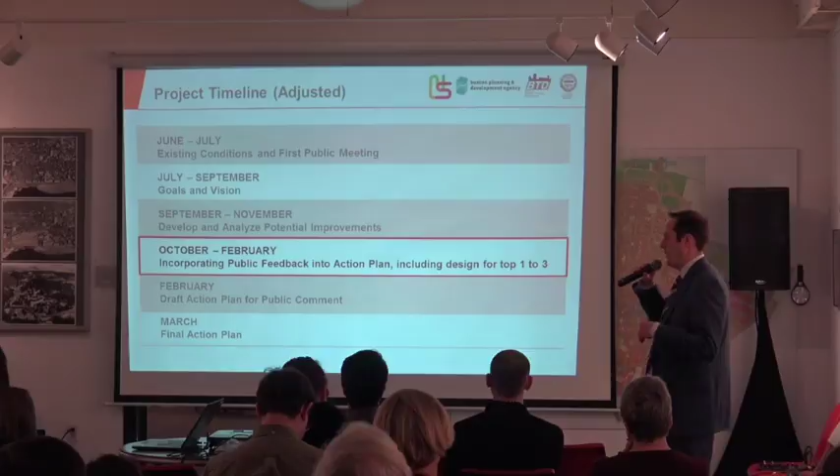We got things rolling over the summer, kicked things off, and right now we're in the phase of trying to develop and synthesize and improve on some action items and recommendations for the plan that we're going to present to you tonight.

Based on your feedback from both that November meeting and the online polling, we're going to recap that, and hopefully these action items are in line with what you guys want to see improved out there.

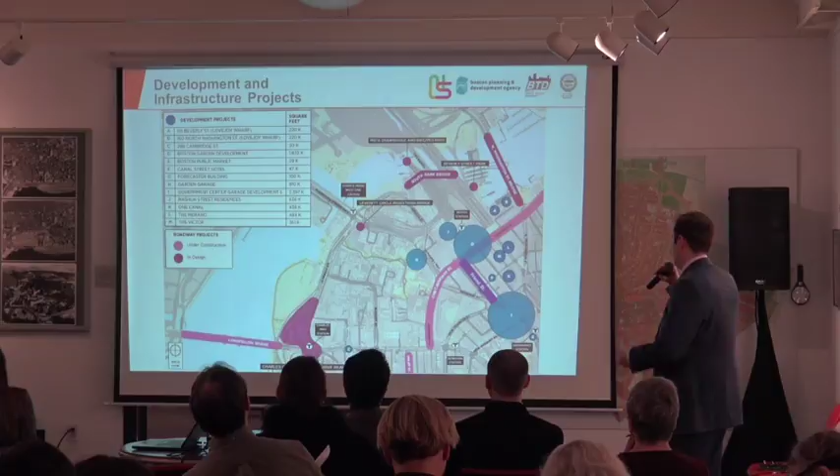This is also a recap slide of a lot that's going on here, both on the private development side and the infrastructure side. The purple is kind of public infrastructure projects that are either underway, nearing completion, or even some longer-term action items that are underway. The blue is all the new development that's coming online.

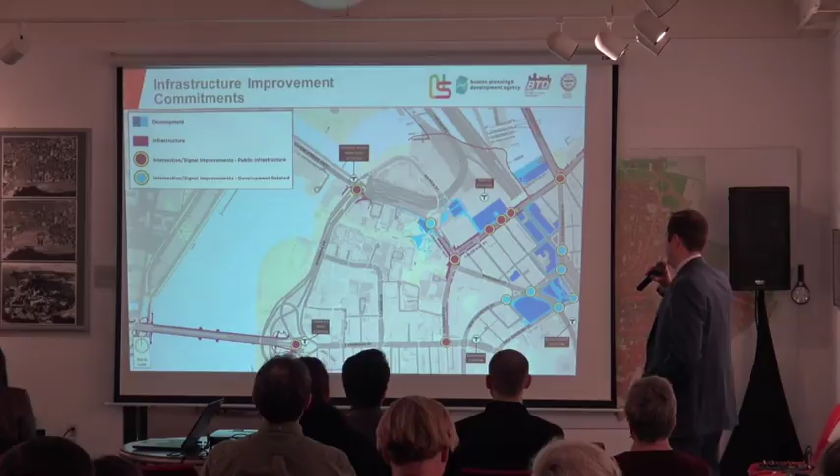I think we've said all along that the emphasis of this plan is to get to actionable items. I think most of our items are on the short-term list, but we also have scope and budget in this process to actually design anywhere from 1 to 3 immediate action items that we're hoping to get done, hopefully within the year, so we can start seeing some real improvements out there.

Just again to recap, we have an interagency team that's been involved. We have Lauren Shurtleff from BPDA, she's a neighborhood planner. Maria Landcliffe from ONS. Bill Conroy is also from the Transportation Department. Public Works has also been coordinating directly with us. Kay Bernard-Smith actually fell ill and she's not here tonight either. But the consultant team, I think we hired, is led by Howard Stein Hudson. Pete Stipman, who's the project manager for us, is going to take over now and walk through all of our ideas for you to react to and give us your feedback on.

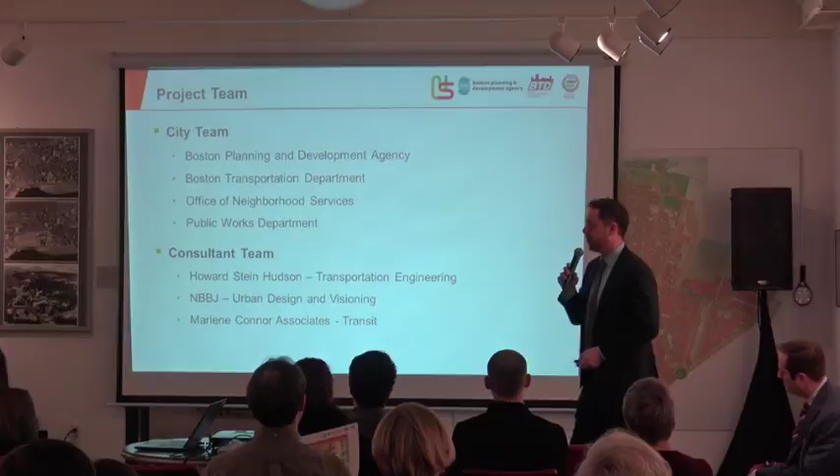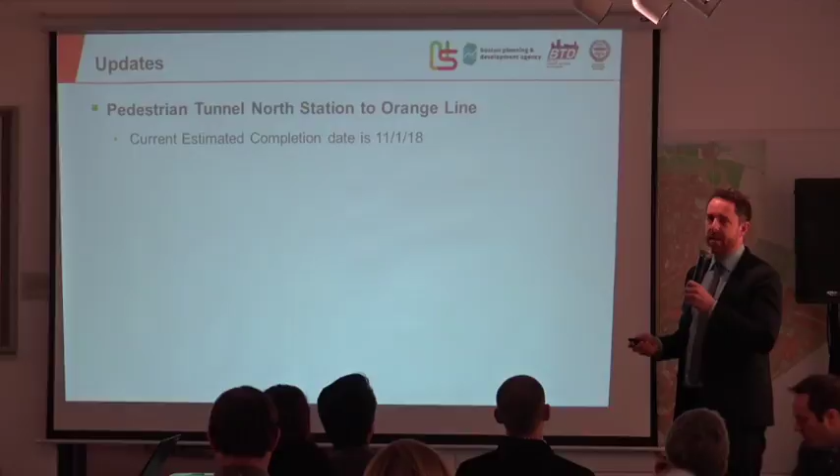First I want to go through the whole process we've gone through so far together, and I want to thank all you guys who gave input. We've done it a lot of different ways. We'll go through it: wiki maps, public meetings, we were actually out on the street, we did design charrette type things, and big, large group discussions. We've really tried to make sure the action plan is rooted in what you guys are telling us.

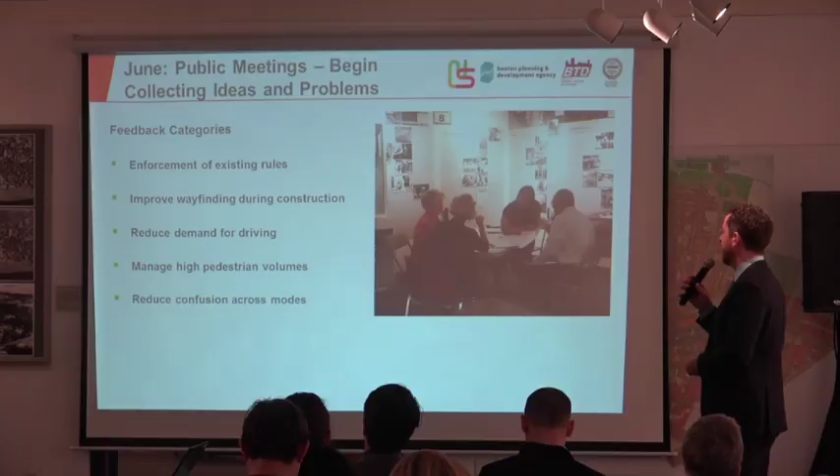To recap quickly, back in June we started with a public meeting where we asked people about their ideas. This is just a smattering of the stuff we got. We heard about ADA issues, traffic issues, people trying to get places walking, all different stuff, and we used maps to collect a lot of that.

Then we took it out on the road and went to different parts of the neighborhood strategically. We wanted to talk to transit users, people using the parking garage, people walking through the throughway and residents, people using the area for shopping, and also on Canal Street, which is a major thoroughfare for a lot of folks.

So when we were out there, we also got tons of feedback. We had about 9 or 10 of these maps full of comments, a lot of interesting conversations, and really enlightening stuff. And then we actually went further and took that onto Wikimap.

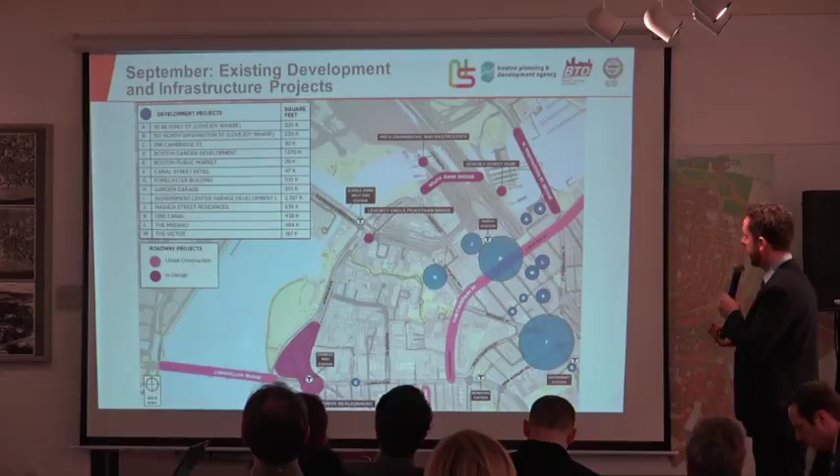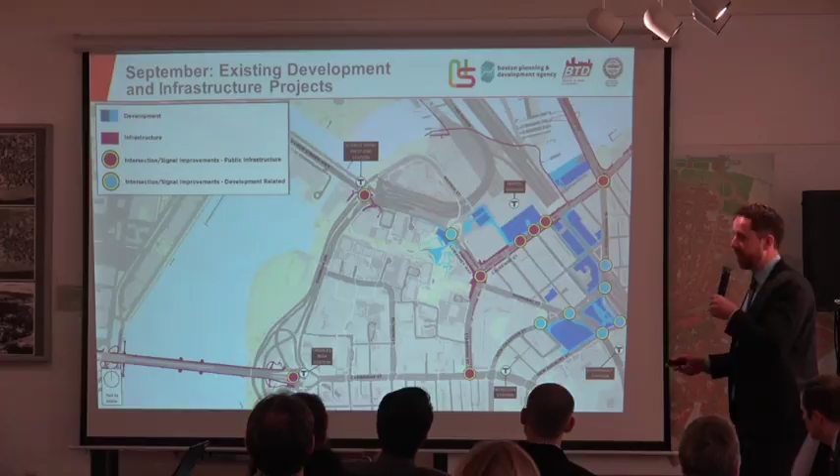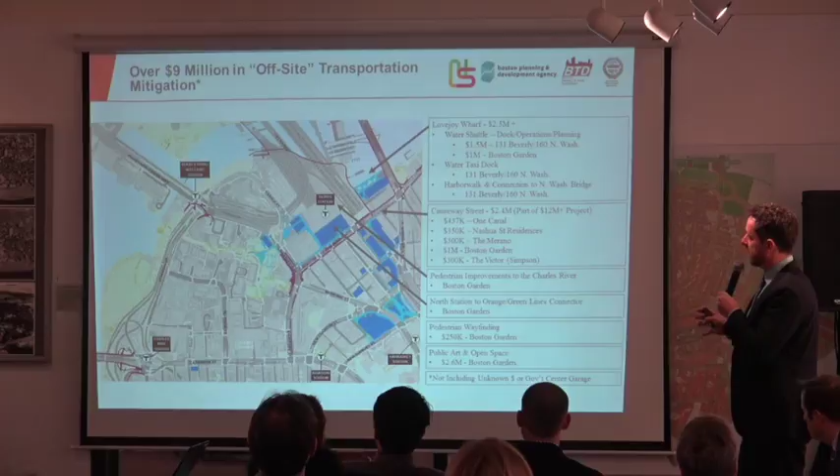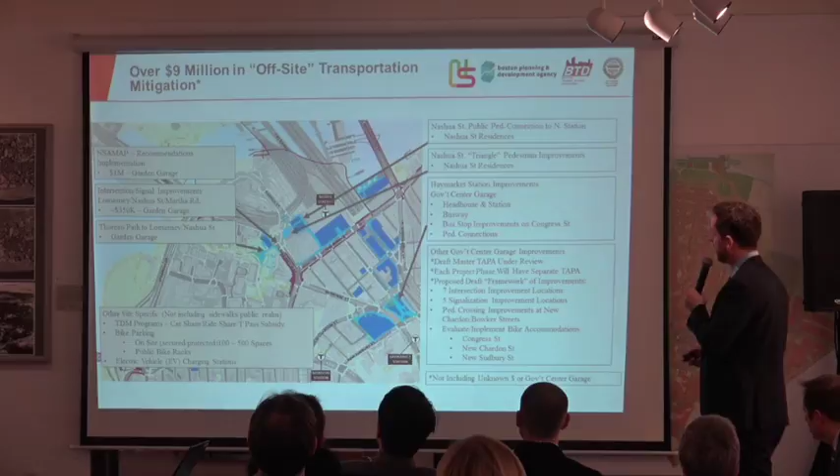And we also talked about the other things that all the developers are doing. This is a list of stuff that Jim put together, but we went over this in September. There are a lot of different things that the different developers have committed to improve the neighborhood.

So again, back to the existing project we were just talking about. In November, we started to combine all this stuff. We had a huge list of ideas and problems from all of you, and we needed to get to some action items to choose from. So we described this process that we used to get there.

Some of the projects were in other jurisdictions. We talked about some of the projects which just weren't feasible. We combined a lot of the different ideas and problems into projects that we could have a manageable group of projects for you guys to consider. We ended up, in the end, also adding a few things, maybe 6 or 7 projects based on emerging best practices around the country, stuff that's just new technology coming out now.

In the end, we came out with 41 action items. And you guys, how many people were here last time? Okay, good. How many people have been to at least one of the meetings? All right, cool. So we've got a lot of people who know what's going on.

So last time, in November, we got those 41 action items in front of you with descriptions and estimates as to their impact and all sorts of things, and took a temperature taking of how you guys felt about it. Everybody had thoughts. Everybody could contribute to what they thought was the most important thing for the neighborhood.

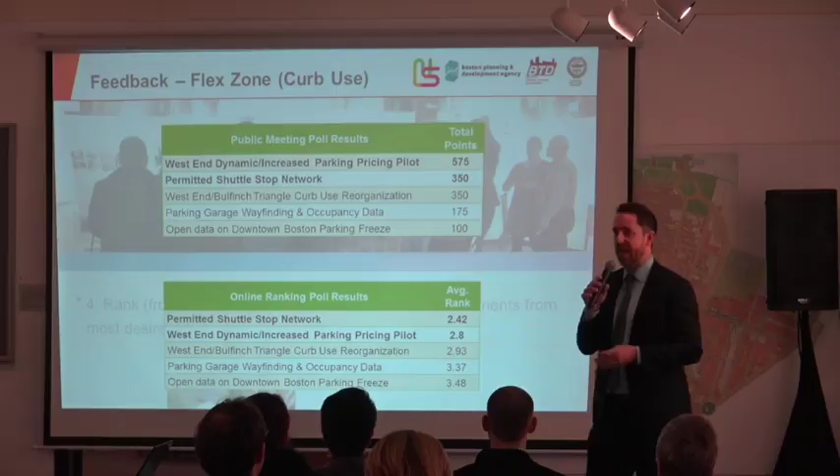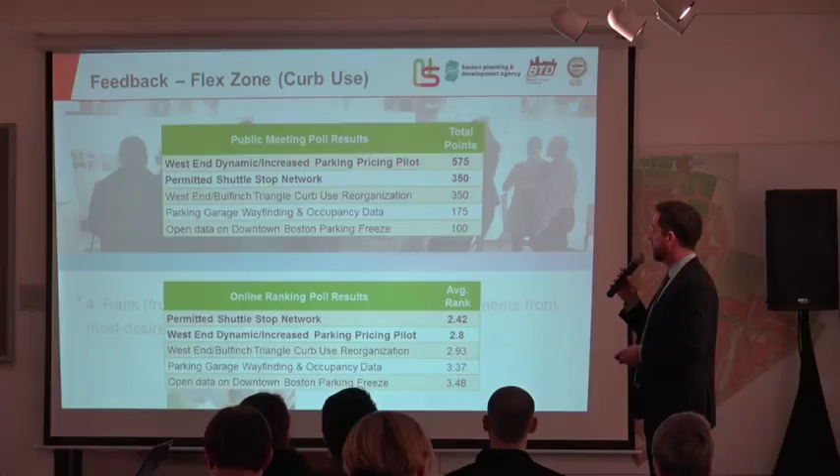And then the permitted shuttle stop network was another idea that got a lot of love. This was an idea to organize the shuttles by requiring them to have a permit. As part of that, getting that permit, they would have to give the city GPS tracking records so you know where they stopped, where they went, and all that kind of thing, so you could better control the movements and keep them out of the way of the traffic and make sure that other issues can be dealt with. So both of those are addressed in the action plan.

Now that we've gone through the feedback, let's take a look at the action plan. Again, we want your feedback on this tonight. Towards the end, we're going to talk about two of the projects we would design as part of this process, and we want your feedback on those ideas. They're very initial, early concepts that we're just going to throw at you to get your comments back so we can improve them.

But this is the entire action plan first.

Motorized traffic. By the way, I don't know how many of you saw in the back of the room, we have a short-term and a long-term map that has all the projects on it. It's a lot of stuff, so hopefully that can make it easier for you to conceive of.

For motorized traffic, on the map we have the Bulfinch Triangle curb use, the new traffic signal at Nashua, don't block the box signage—we'll talk about that in a minute—West End signal timing, and getting local employers engaged in TDM, and the adaptive signal technology study. We'll go into some details on that in a minute.

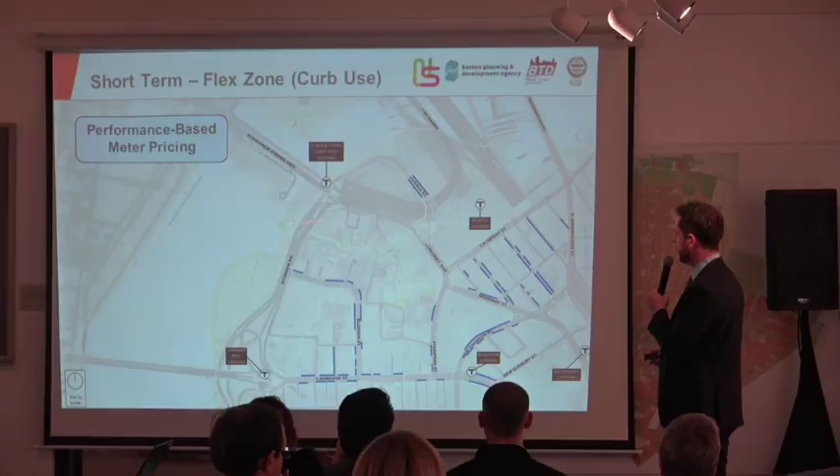Just to preview a little bit, Bulfinch Triangle is one of the projects, and there are many aspects to it that are beneficial to pedestrians, but also car drivers and shuttle users. We're going to talk about that after I go through the entire action plan.

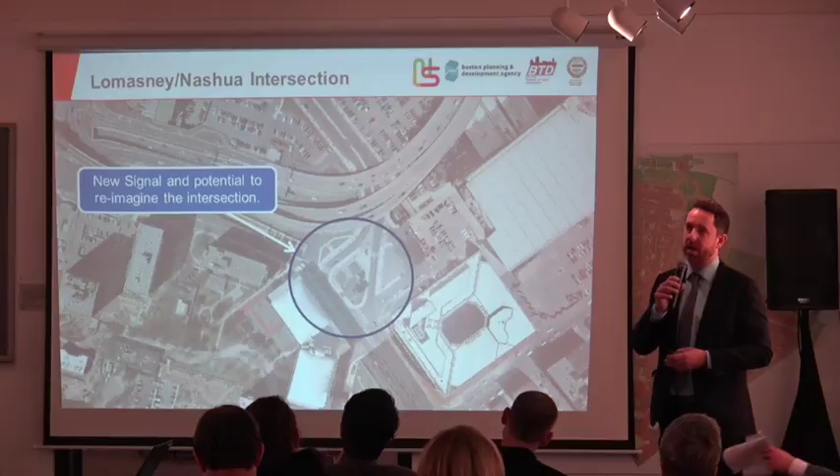Also, the Lomasney Nashua intersection—this was a huge thing for a lot of people driving or thinking about driving. There's a lot of movement as part of the development going on, and other discussions about reconfiguring this intersection. We didn't show any concept because there's basically a lot of vision going on right now, and we want your feedback and ideas on that.

So basically, as part of the action plan, we would start that process by adding the signage, and the rest of that would involve BPD.

Another big idea is transportation demand management from the local employers. You guys have a lot of large property owners, a lot of large employers in the neighborhood, including TD Garden. We actually found a lot of examples in other cities where sporting venues work with their fans in different ways to get them to take different routes to the event.

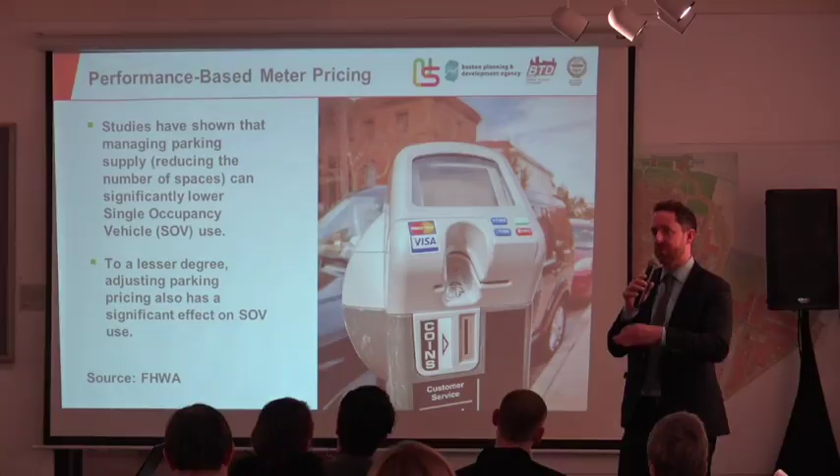The adaptive signal technology study is actually already underway as part of other development going on in the city, and new adaptive signals would probably be related to new development. Adaptive signal technology can help shorten peak period impacts by better managing signal timings before and after the heaviest traffic time. I don't want to oversell it - it's not a magic bullet that's going to eliminate rush hour, but it can reduce delay in off-peak hours and overall reduce delay, and delay is a considerable cost for the city.

It can also be very expensive, and it can be helpful during special events. Now, the special events here, we know, have police that come out and regulate all the traffic, so it's not necessarily helpful in that situation where the signals aren't being used. But say you have a smaller event that causes a smaller type of disruption where they're not using all the police forces, it can adjust to that.

Now we'll get into the transit stuff. This is an overview of all of them. The bus lane, we're doing some stuff with shuttles that's related to the Bulfinch Triangle project again. North Station Airport Shuttle, and the interactive transit screens - that's the piece of the mobility hub idea I was talking about earlier. I'll get to more about that.

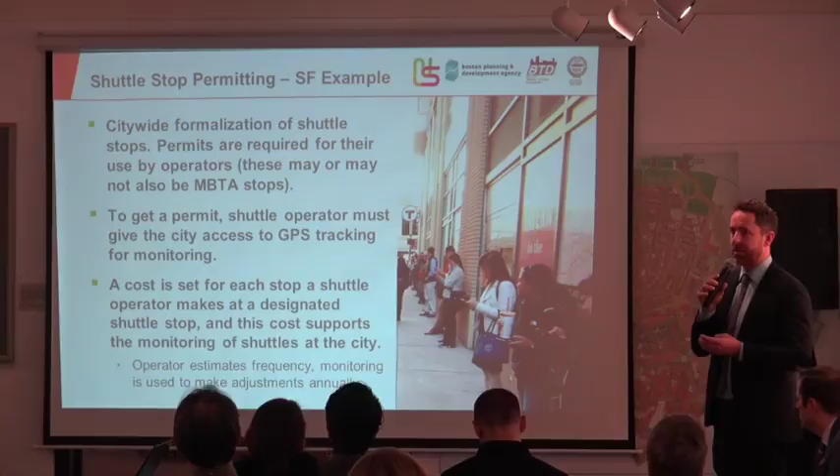This broader shuttle consolidation idea works really great for EZRide. Imagine if every one of those little letters was a different kind of shuttle coming from Cambridge. EZRide consolidates it all into one, and they deliver over on the Nashua Street side of North Station. And we didn't get any complaints about EZRide.

Another short-term thing - and I should say short-term projects have a time window of 1 to 5 years. A lot of them are on the sooner side, but it's a wide spectrum. The MBTA ferry, and I don't just say that for the ferry itself - the ferry is imminent, and the Lovejoy Wharf ferry is part of the short-term plan.

These are just a fake mock-up of what a transit screen might look like. There are a lot of different companies getting engaged in this work, so it could be any of them. Basically it would allow people to do trip planning on a large interactive screen, so they could figure out how to get to different places without driving.

Then the North Station Airport Shuttle. When we reached out to Massport to talk about the airport shuttle, it turned out they had been thinking that would be a good idea for quite some time, because in order to do their Back Bay Airport shuttle, they had done a lot of surveys about ridership. They have an enormous ability to survey their passengers, plus 15,000 employees and whatnot, so they have a good idea of what people want.

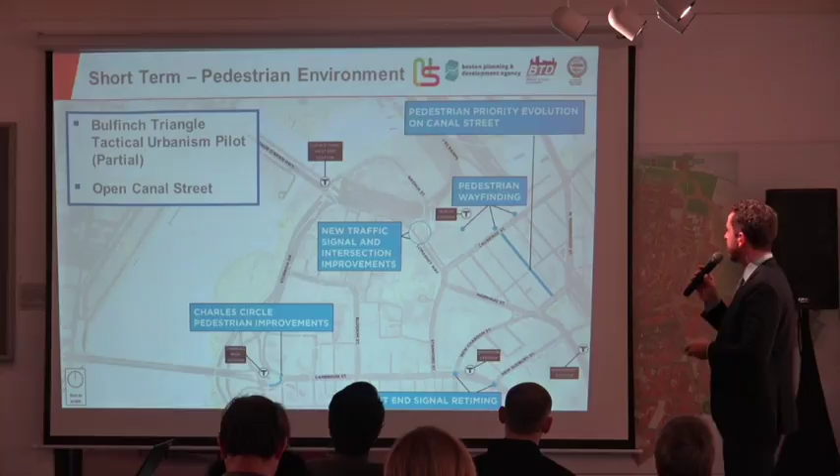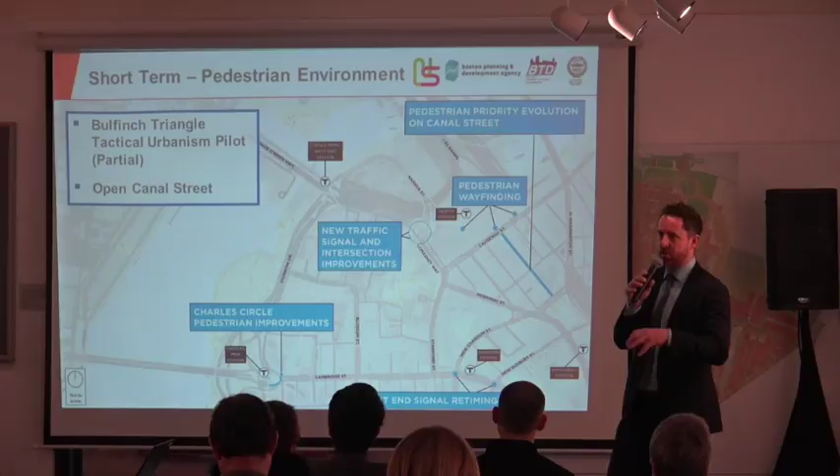Pedestrian wayfinding is something that would be related to development - you basically put pedestrian wayfinding kiosks at all the exits. Again, we have that Lomasney-Nashua intersection we talked about, and Charles Circle pedestrian improvements. It's previewed here, but we'll talk more about it when we get to the concept - this is the other concept we designed as part of this plan. The West End signal will be timed really well, so here's just a little preview of that Bulfinch Triangle idea.

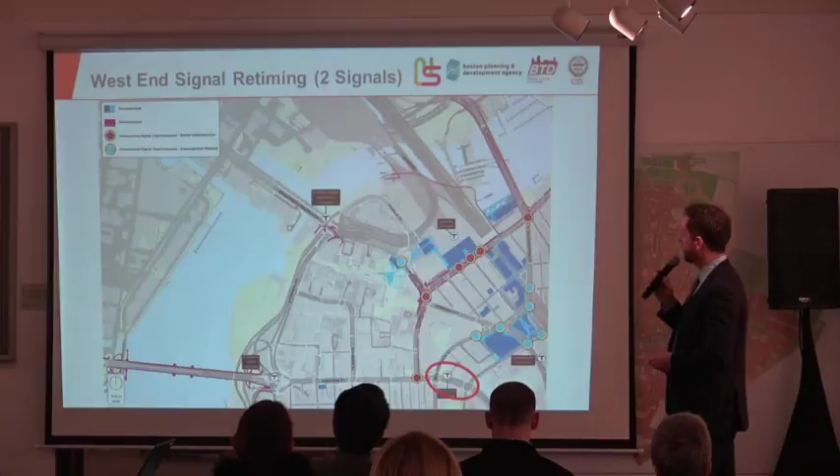West End signal timing - showing this slide, it tells a repeated pedestrian story because it has benefits.

So it would be a significant connection of all that territory over to the river, where you can access Cambridge in different ways, including in the future the MBTA drawbridge right here, which will be a big improvement as well.

That project is underway. Another place where there's a lot of room on the street is Blossom Street. This is probably more focused for people at MGH, and it would have some safety improvements, because currently it's not marked for four lanes on the entire street, only in some places, and there's a lot of friction and disorganization. There isn't a need for all those lanes, so by adding a bike lane you'd create a safety element for pedestrians by making it less confusing and more understandable.

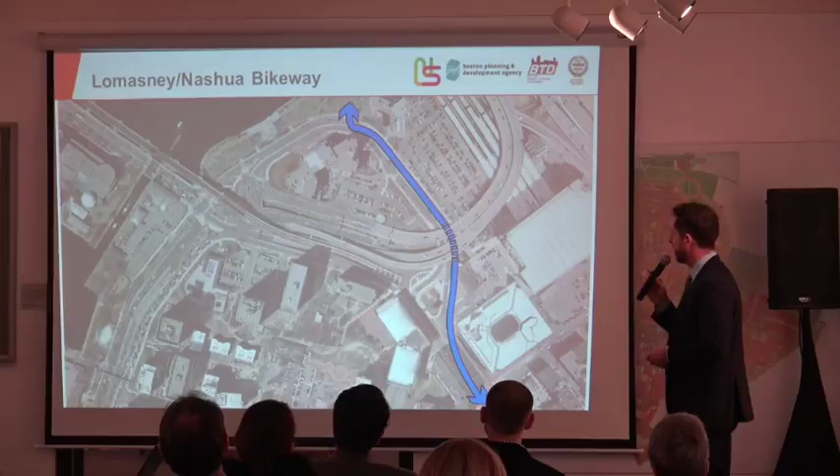So here's just another image of the Lomasney/Nashua bikeway on the satellite.

To go back and relate this to the action items, the 41 action items we saw last time in November, we're actually addressing 11 of these top-ranked action items in the short term and partially addressing 6 more. So roughly a third of the action items are touched. And then we also have the long term.

It's just a few projects on here now, but we talked about Canal Street coming up for reconstruction at some point in the future, and those evolutionary ideas we're experimenting with contributing to that.

One of the most popular items on the transit menu was the bus priority lane between North and South Station, and actually South Boston beyond that. Currently there's not a concept for that, but there's a lot of momentum behind it in the city, so we wanted to include that as a long-term action item.

And then the Cambridge Street protected bike lane. I know this is the top issue for bicycles, and we poured over the plans for Cambridge Street. The way the street's currently configured, it would require reconstruction in order to fit in even a bike lane, since the median takes up a significant amount of space. So there had to be some thinking about trade-offs on that street, and it would be a longer design process. Very important to the city though—it's being called out in Go Boston 2030 as part of that, so there's a lot of recognition that it's a priority.

So here's the Bulfinch Triangle. When we started looking at this, a lot of different comments played into it. We got a lot of comments at the public meeting about the Bulfinch traffic circulation being difficult, so we knew we had to make it easier to navigate by car. The canal foot traffic, as I mentioned, was going to go up by 50% or more, so we wanted to make canal more pedestrian oriented. We also knew the shuttles were causing congestion and a lot of complaints for being on Causeway and causing friction, so we wanted to put them in a nice place off Causeway Street—nice because we want people to use shuttles, not choose to drive.

But we also had some limitations. While we wanted to make it easy to get through and access neighborhood stuff, we didn't want cut-throughs to the highway, so we wanted to prevent certain moves. Also on Canal Street there's truck delivery, an actual private paid parking lot in the middle of it, and some other things that need car access. So we wanted to design a shared street, not a strictly pedestrian street, but something usable by all people with more priority for pedestrians. We also wanted to make sure the shuttle stays speedy, because we want to help keep cars off the road and make that a convenient option for people. So we want to make the circulation simple.

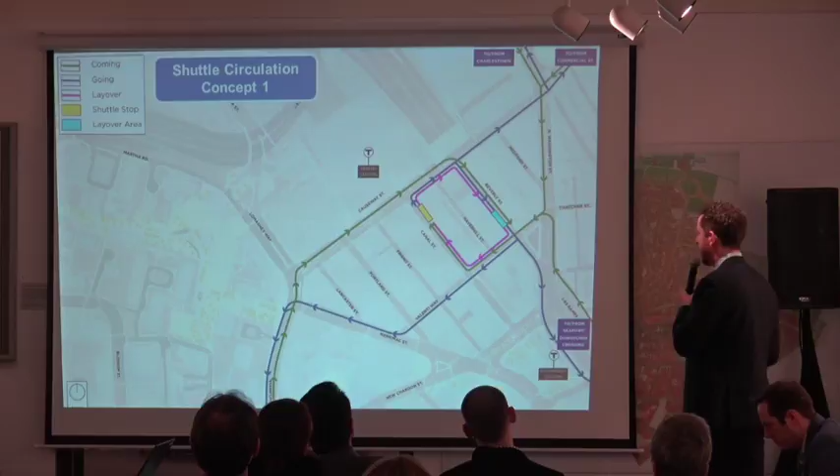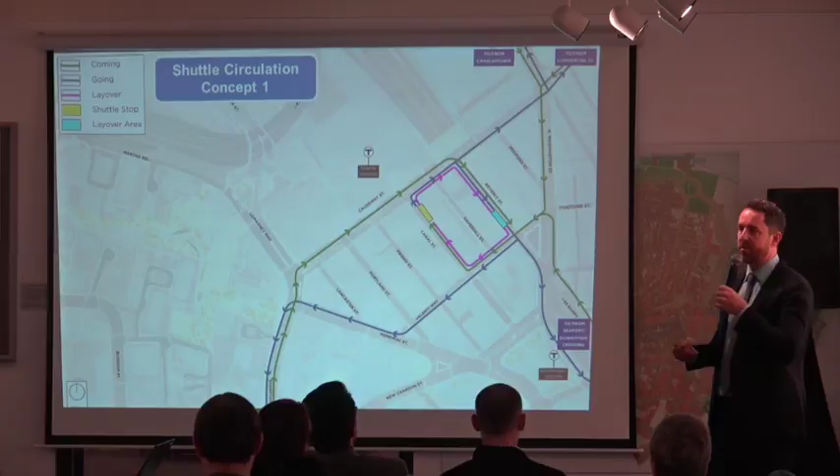The reason we think about Canal Street as a place for shuttles is because on Canal Street you have a lot of services for people. You have all the restaurants, you have a cafe right here, and some storefronts that have yet to be filled along here. Basically you're providing a lot of customers for your local businesses, so that gives you, over time, more options and places to shop, because these shop owners can survive better.

But also to continue the shuttles, some of the Seaport shuttles come off of Commercial Street, so they would come in this direction, and maybe down the same way. Some of the shuttles come up Congress Street, so they would turn in here, and then leave down Congress Street that way. Now the shuttles from Cambridge all come over here. We didn't depict that, but that's well organized and wasn't an issue.

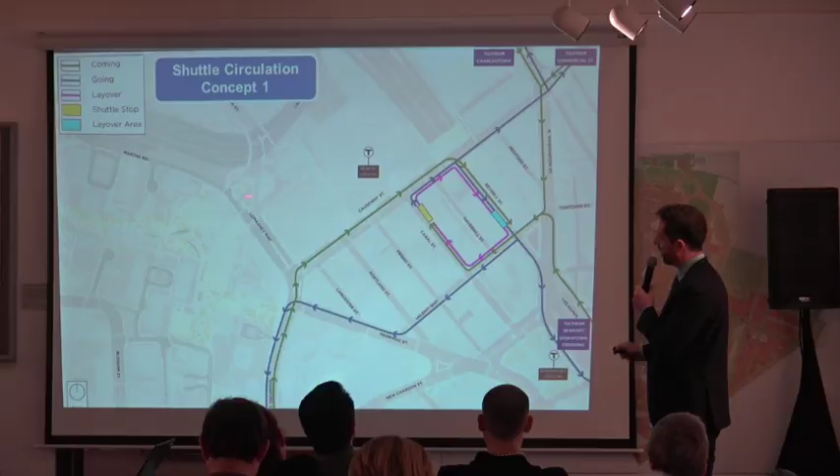If we made that two-way, for instance, we'd have to relocate that commercial parking to someplace out of the way. But that's the only Valenti Street parking change. Then there's the question of what to do with the other spaces that are available, we could look at that as well, to balance some of this.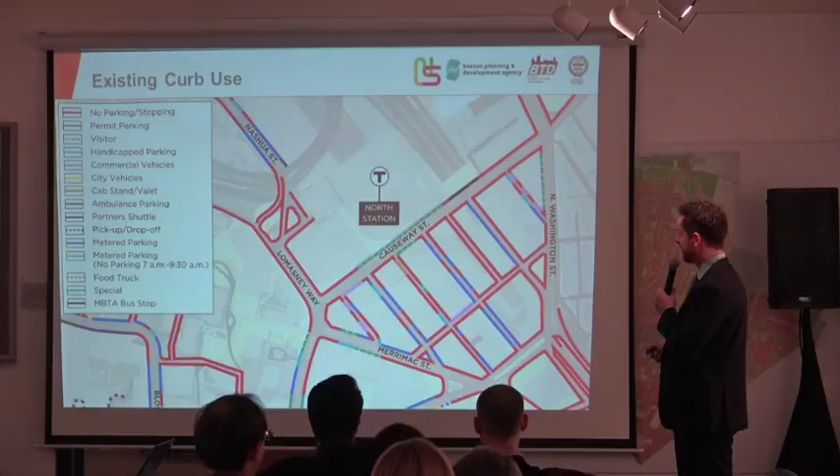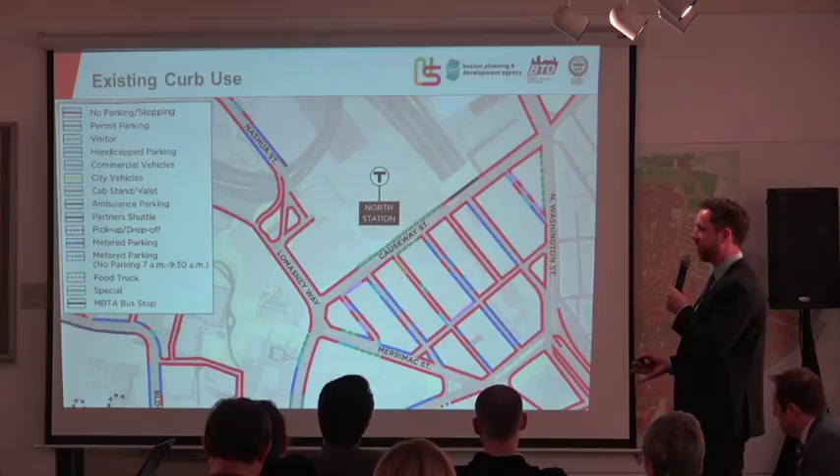We could also leave some parking spaces on Canal, as we saw on Bell Street in Seattle. So it's not a wholesale ripping out of parking spaces, it's a rethinking of the area.

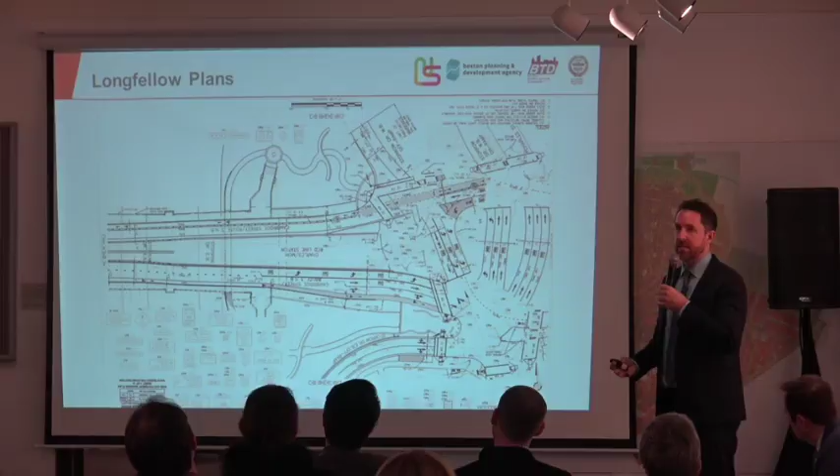But we just thought about the complaints we were hearing. One of the complaints was that bicycles have a really tough time navigating this area. It's very hard to understand, and they're all trying to get to Longfellow Bridge because it's the only way to get across the river, or a lot of them are. So we thought about this—like we mentioned before, Cambridge Street is a little too tight to put bike lanes on, but we could start to provide something just into Charles Circle.

So this is obviously an early draft concept of a protected corner. Bicycles could come up here and wait outside of traffic, and wait for a signal that would safely tell them when to get across on the right.

Similarly, coming the other way, this is an existing bike lane that's in this Longfellow plan already, as is this section of these striping plans up here. This is already going to be there. It's this part that's not.

So here we thought, okay, there's some cyclists that come zipping through here and wouldn't mind at all merging in this crazy merge over here. But there's also a lot of families and other people that are using the Charles River as a recreational place and accessing the neighborhood.

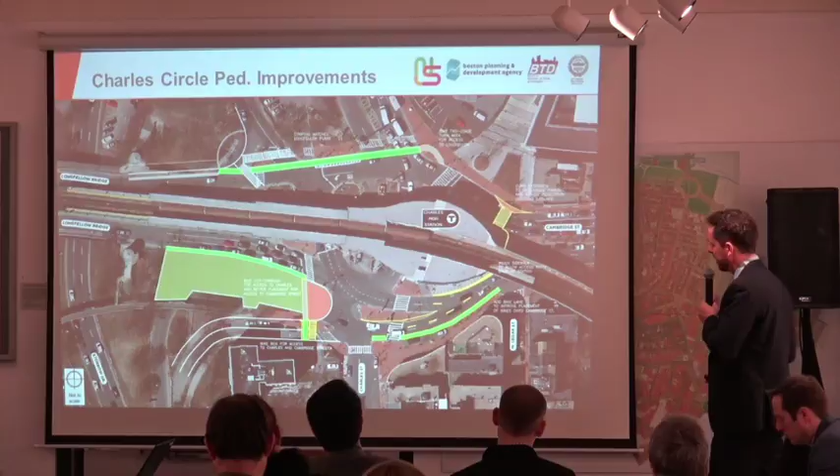So that's the basic Charles Circle—just a close-up of the bike area here, and a close-up of the rest of this stuff.

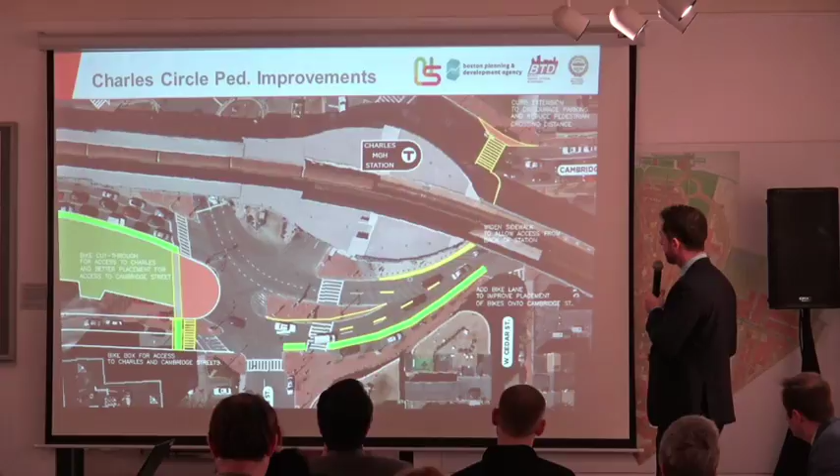And that's essentially the action plan. There are two concepts. Now we'll take comments from you guys and start a discussion on the entire action plan. Is it enough? Is there something in there that's missing that we really need to have? There are concepts behind it, but also our next bit of work is to work on those concepts and improve them. So if you have comments about those, we want to hear those too.